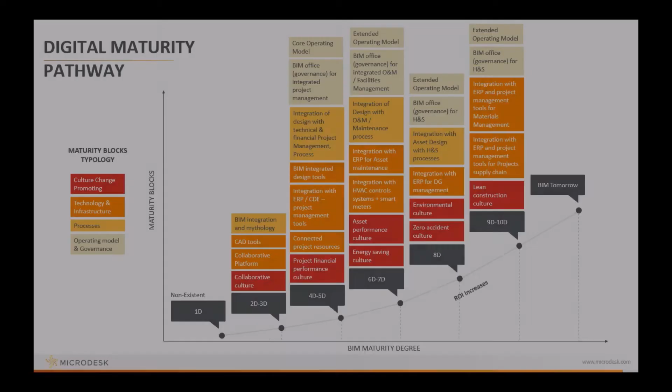Really the big driver for this advancing technology and its impact is all based around the project lifecycle. For many years, there have been siloed workflows for different areas of the project lifecycle. For example, CAD tools were being utilized in the project planning and design phase, and then that information and data would be sent, maybe in a 2D plan, maybe within a model file, over to construction. But at some point within the project lifecycle in traditional workflows, that information and data gets dropped out of those model files, and then things are either manually or otherwise exchanged over to other processes.

Now looking forward, especially for agencies and owners of assets, digital twin is really introducing a new advantage for the exchange of information. So this is taking the information from our models all the way through the construction phase into a digital twin that can help assist with asset management, operations and maintenance, and ultimately help with capital planning as well. So it's taking that data and exchanging it throughout the project lifecycle. And in 2022, there's a lot of tools available to help with this process.

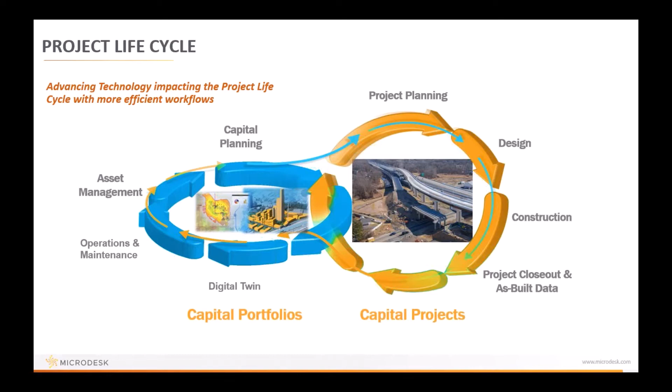that digital transformation can really be catered towards your agency's goals. So if your agency's goal is to improve sustainability or maybe focus on certain asset management, that data that is first initiated in the planning stages and design stages can be catered to be exchanged throughout the project lifecycle to those different items or goals that you may have.

Just to give a few more examples of how this is being implemented, right now there's a big push towards digital models, or I'll say digital delivery, as that's the familiar term within our industry today. So AASHTO has created the JTCEES, the Joint Technical Committee on Electronic Engineering Standards, where they're trying to implement standards on a national level for digital models to be produced following some type of national standard. We also have FHWA, which created this as part of one of their EDCs, their Everyday Counts initiative, which focuses on digital as-built and e-ticketing. So we're starting to see different sectors transform on a national level with different guidelines for moving forward as well.

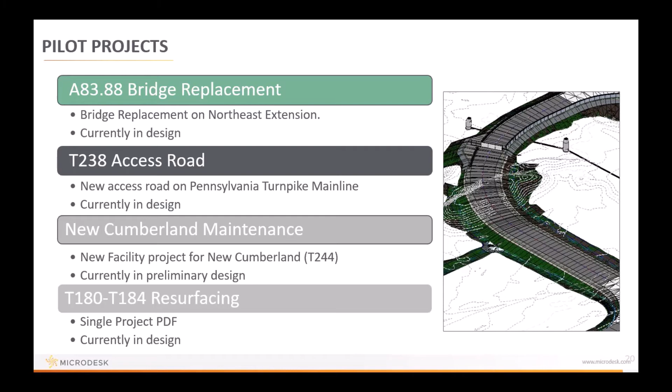Thank you, Steph. Yeah, thank you, Butch.

So this is kind of the fun part, I will say, of the presentation. We're going to get a deeper dive into some of these modeling efforts for each of these pilot projects. So the first project we have here is A83.

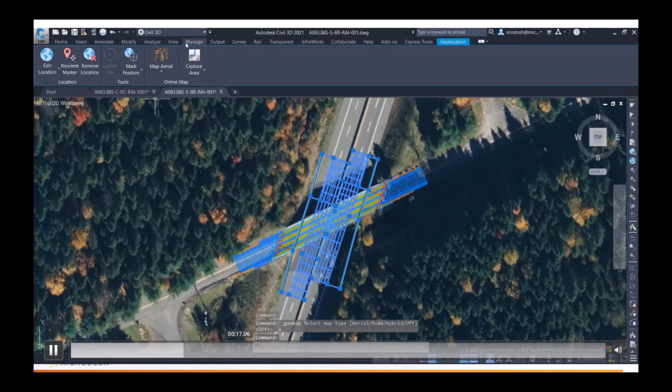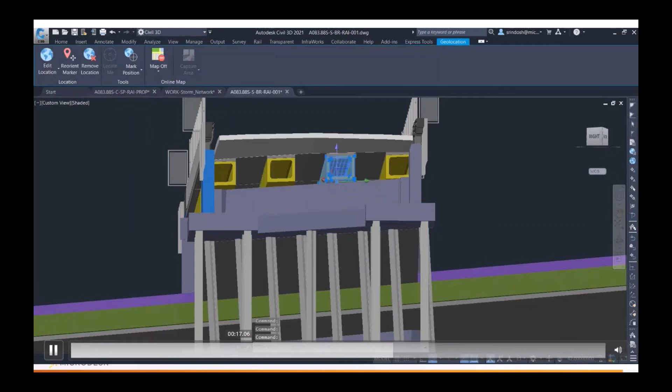This is the single span bridge replacement project over the Northeast extension. What we're looking at here is the bridge model within Autodesk Civil 3D. Now, this effort is actually using 4 products, part of the Autodesk collection: Civil 3D, Inventor, Revit, and InfraWorks. You can see here, just by bringing the structure, this is during preliminary design. You can easily isolate one item and look at its property information. This project is also utilizing customized typicals or cross sections.

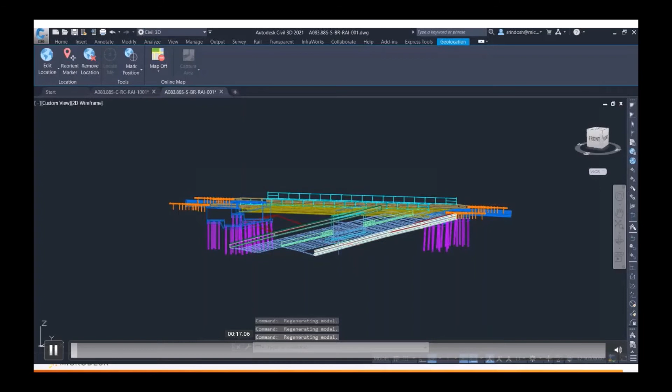So what's really unique about this project is the material information that's unique only to the turnpike's use currently can be dropped down for each layer of pavement. A big next step for this is currently working on extracting that data out and then ultimately streamlining that data into PTC's asset management system appropriately.

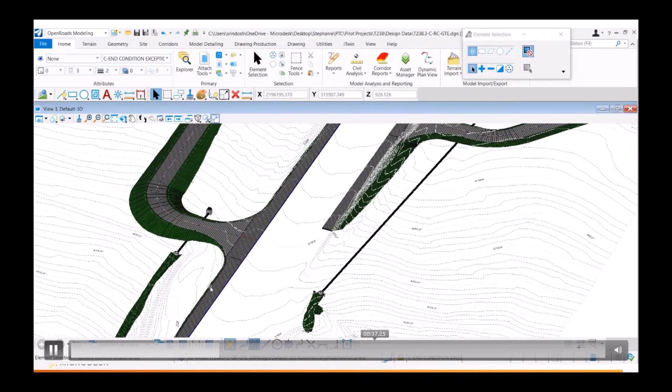The next project is T238, the access road project along the Pennsylvania Turnpike Mainline. So this is creating access roads on the eastbound and westbound side. As you can see here, this is a low risk project. So starting off with a roadway project that's low risk, some access roads here that has some stormwater components.

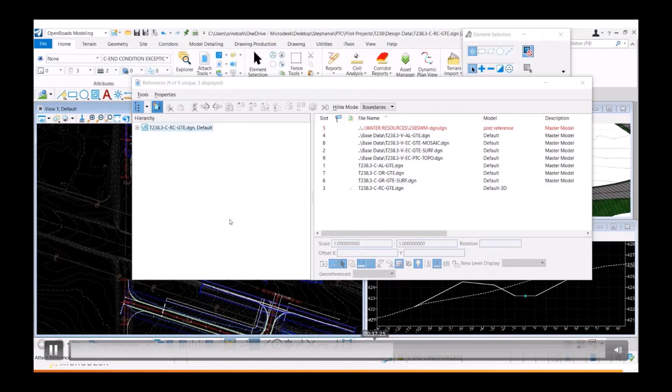Now with PTC being CAD agnostic, this program is Open Roads Designer, which some of you may be familiar with. And then here we're going to be adding in some of those stormwater components so you can see what it looks like in a 2D view, and then some options for 3D viewing as well. One of the big uphill battles is making sure that all programs, so from Autodesk as well as Bentley products, can complete the same required deliverables that would be part of a hybrid package or for that model turnover.

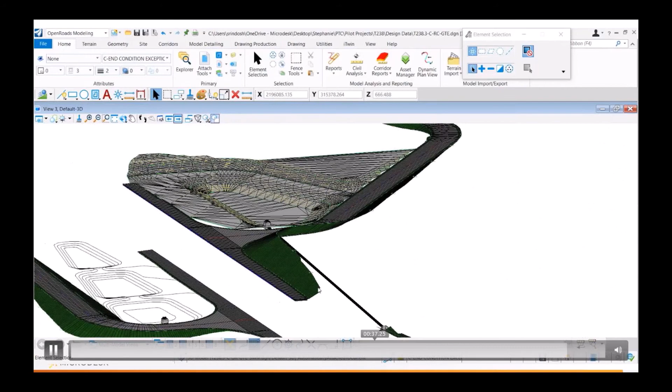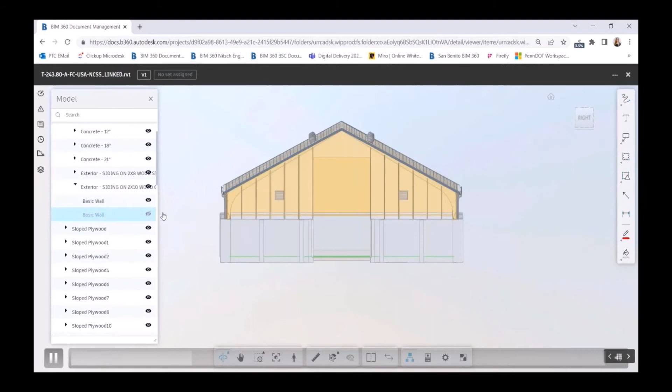And then moving along to the new Cumberland Maintenance Facility. So this project is utilizing Revit as a tool for the structural design aspect of this. However, this is not within Revit. Right now, we're just looking at one of the buildings on the BIM 360 platform.

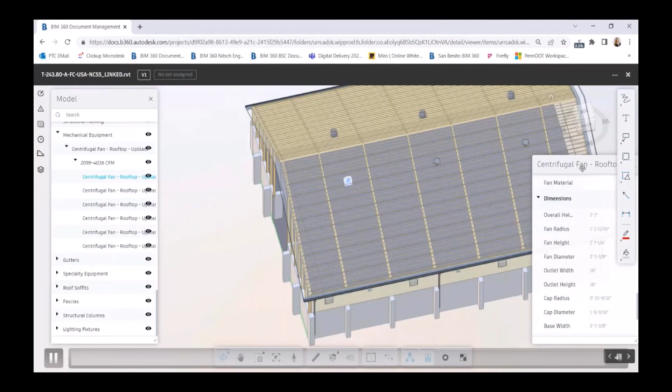So another big effort, a part of PTC's digital delivery program, is finding a common data environment where you're able to view and collaborate on a project. It would be a lot for anyone to be a master in all these programs, especially being CAD agnostic. So one of the goals is to find a common data environment where you can quickly view the property value, make assessments, mark up comments within each building, within each file, be able to look at a federated model, or I should say master model, and collaborate on the design.

And that way those comments go back to the designer. They're able to respond and make updates appropriately.

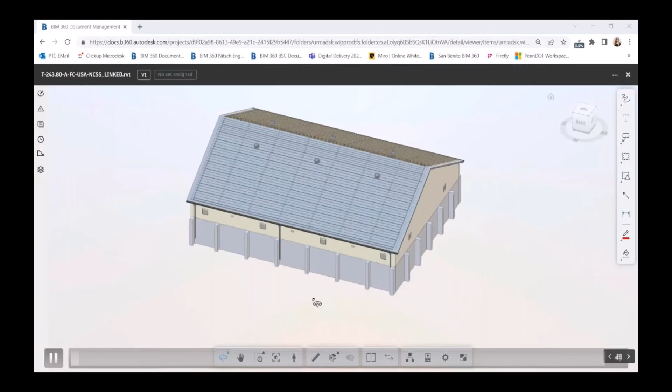So really the big advantage here of a single project PDF is this is starting to adapt from sheets into just one file. So instead of having a bunch of sheets that could be part of a design set, we just have one large file that can easily be zoomed into and then used on an iPad in the field. So this is getting contractors to become more familiarized, instead of having print out sheets in the field, to start utilizing tablets to look up information according to that design.

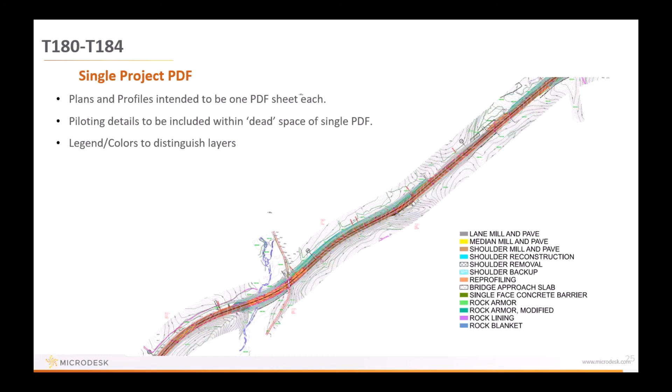So that's just a little brief overview of all the pilot projects that PTC has currently that are in design. It is not an all-inclusive list, as things are being developed as we're moving forward through different stages of that digital delivery program.

Looking a little further forward, it's important to highlight some limitations within the transportation industry, especially when it comes to digital transformation. The first being software capabilities. Regardless of the platform, whether Autodesk or Bentley, with the pilot projects there have been limitations when it came to modeling appropriately.

It could be something as simple as not having the capability to model the joint on a bridge appropriately, or it could be getting into nitty-gritty details where the program's not acting the way it should. So there are some limitations with the software, and that's something the Turnpike as well as other agencies are considering, adapting their deliverables appropriately. Where things might not work, this is where that hybrid deliverable approach comes in, where you have your printout sheet, cut sheets, or PDF plan set in addition to the model files.

Another big item is national standards. AASHTO is working on national standards, but currently there's no big national standard for the horizontal sector, the horizontal industry. The vertical industry has a lot of established BIM standards, especially for level of detail, your LOD matrix, with multiple established standards used in building design. However, when it comes to horizontal, there may only be about 5 or 6 categories, which doesn't necessarily set a standard or expectation for how things should be modeled and to what level of detail.